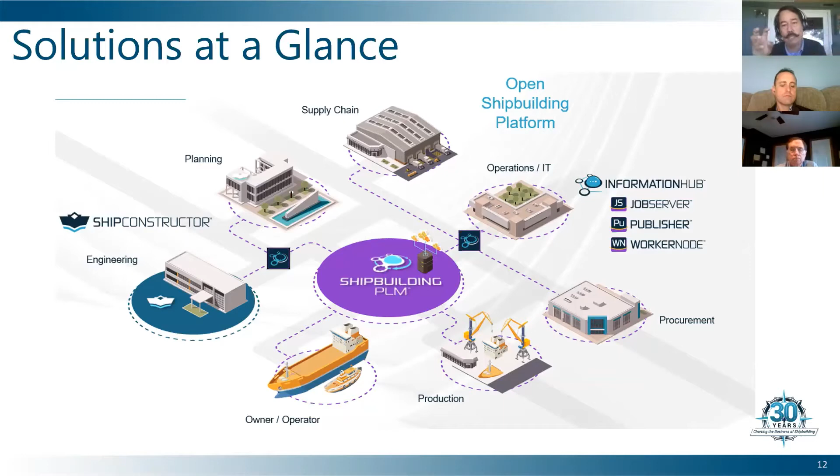And then, of course, the downstream of this is once we've built and delivered, we theoretically can provide either the model or management to the owner operators for fleet management or sustainment later on. And that's kind of where that PLM nugget ties all of that together.

This just says we have lots of products. In this project, we're focusing on structure and structural modeling, but we do quite a bit more than that - piping, HVAC, electrical, outfitting systems, distributed systems, equipment, penetrations. This is all kind of in the modeling and design work of this.

Nest and NC Pyros, for example, are kind of fabrication production tools. Work share and report, or purely reporting information, Ship Explorer and some other things. So we have a full suite for the ship design and product modeling requirements for a modern shipyard.

And we've done lots of stuff. I've known Rolf, who was the owner and founder of the company back in the day, probably since 2001, which is really when I started working on it heavily. So down at Bender Shipbuilding, which is actually the shipyard where I started working way back in the day, doing offshore supply vessels and platform supply vessels - that's what OSV and PSV mean down there.

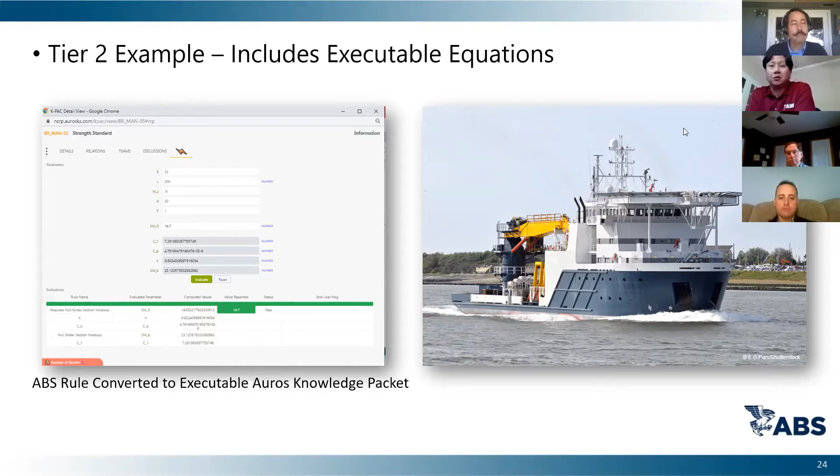Last slide is about tier 3. Tier 3 tools include K-PACs with executable equations and also can be linked to a CAD model. While at SSI and Auros since last year, we have been identifying a lot of beneficial use cases, such as global or local section modulus calculation from the 3D model and some plate thickness and stiffener scantling requirements.

With a given frame or stiffener spacing, we've also investigated how we can verify weld leg lengths based on ABS rule requirements just by clicking one button to verify the required welding leg length or welding size, something like that. So we believe this is also a very powerful tool that can allow a user to quickly evaluate the change to a sister or similar vessel design.

Having said these three tiers of our ABS digital rule vision, I believe our digital rules will significantly reduce the non-value-added time the engineer spends researching, retrieving and vetting usable information, and also reinforce the use of standard engineering processes and shipyard productivity standards. Eventually, we hope it can facilitate a faster turnaround for ABS, when ABS-certified K-PACs are used and the results of K-PAC rule checks can be submitted to ABS for preliminary review. That's all I have today.

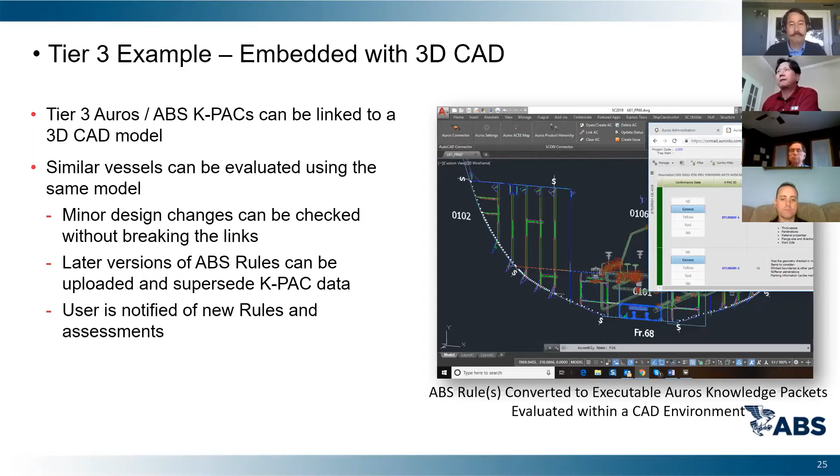Good morning, good afternoon to everyone, and thank you for joining us for this workshop. Hopefully you find it interesting and valuable. I'm a director at Auros Knowledge Systems, specifically focused on maritime systems. Auros Knowledge Systems is located in Livonia, Michigan, about 15 miles west of Detroit. The software product we produce for knowledge provisioning and knowledge awareness is titled Auros IQ.

So sometimes it causes a little bit of confusion, so the product itself is Auros IQ. Our company, we have development in other countries as well, in Ukraine and in India, and we have service partners located in France, India, and China.

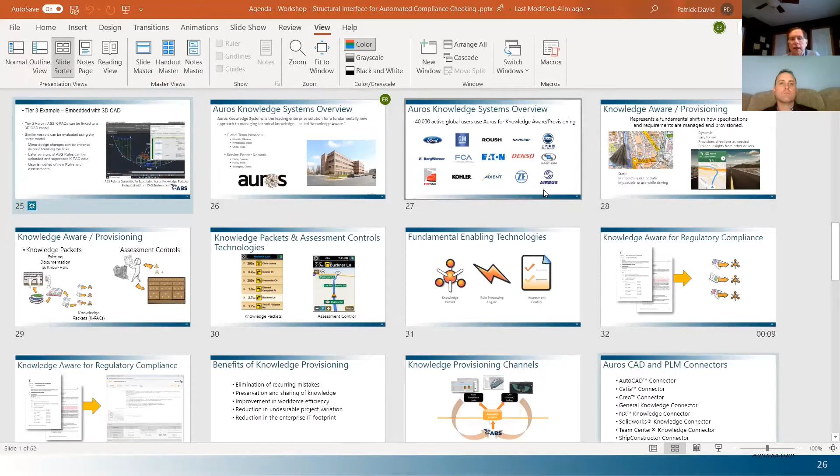So what we wanted to do was somehow—we had developed knowledge-based engineering applications, but we quickly found out that it was very difficult to maintain those, because if you had to make a rule change, you'd have to have a programmer program those rules right into the CAD software. So we came up with the concept of a discrete knowledge base that would not only represent knowledge in textual form, but also in digital form, so that it could be driven into digital tools to allow us to support model-based engineering.

So, as I mentioned, we grew out of the automotive industry, and we have a very large footprint in the automotive industry. We support from start to finish in Ford, General Motors, Fiat Chrysler, but we've also grown into many other industries. We found out that basically the challenge of delivering knowledge when needed is one that's shared by all industries, and the patterns are typically the same. There are some differences, but we've successfully grown to well over 40,000 global users that are currently using Auros IQ.

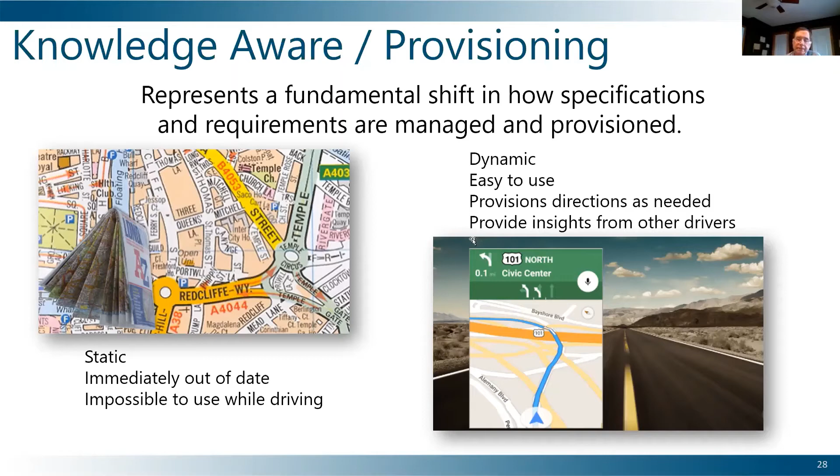So taking that back to knowledge-aware, what we do with Auros IQ is we have what you've heard termed knowledge packets. These are in essence elementary units of knowledge that have been stripped out or combed out of documents, rules, learnings that might occur on the plant floor. They're very specific, very unique to a specific bit of knowledge.

So you can see on the left-hand side here, we show a cartoon where you take these document-based systems and convert them into digital knowledge packets that are on the ready to be delivered when they are needed. On the right-hand side, we have the concept of assessment controls, which you heard Juan mention as well.

The assessment controls are a technology that is part of Auros IQ that is in essence a live, dynamic bucket that has a search routine constantly being updated with new packets or changed knowledge packets that are focused on a particular subject or topic.

So for instance, for someone working on structure or possibly looking at ABS rules for a particular area of the ship, the assessment control has the ability, using agents, to constantly bring in any new knowledge packets that are relevant to what that individual is using.

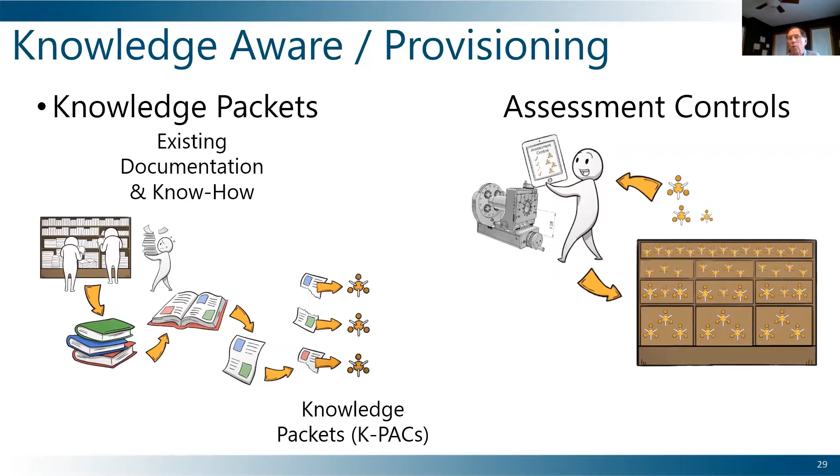They're delivered to the worker, and then the worker, or the decision maker, the knowledge consumer, responds and indicates how they've utilized that knowledge, whether it's been in compliance or not. If it's not in compliance, it allows you to capture the reasons why and what the alternative is. Next slide.

So going back to the map and GPS analogy, the knowledge packets really are those tiles that pop up and give you the specific turn information, where you should turn, when a turn is coming up in the next mile and a half. You can think of those as a knowledge packet. Each one, again, is an individual bit of knowledge.

The actual screen, which is used to deliver that information to the consumer, you can think of that as the assessment control, because as I start, I entered in an assessment or an address.

Based on that address, it delivers and lines up the knowledge packets that I will need at the time their need, and then they will be delivered to me as I progress through my process. Again, if I end up making a change, or there is a change in the system because there's a backup or a road closure, the assessment control is constantly looking for those changes and pulls them up and then delivers that new knowledge to me as a driver. So that's basically knowledge aware.

So Pat, the next slide, please.

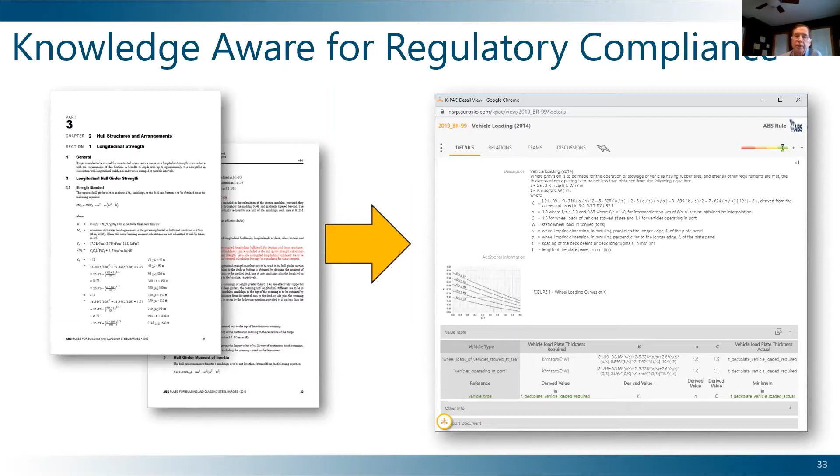All right, next slide, please. So the benefits of knowledge provisioning - these are five that I chose because I think these are some of the most significant. The elimination of recurring mistakes.

Whether it's done through a CAD system or by delivering critical knowledge to a designer as he or she is working on a design, because you've captured possibly learnings from warranty systems in the past or production issues that you've had and turned those into knowledge packets, and those knowledge packets have been tagged and identified for where they should be applied, you can guarantee that things used in previous years can be delivered to individuals that need to know that at this point in time.

Obviously, you're preserving the knowledge that's being captured. And because it is an enterprise system, that knowledge can be delivered to many different locations through many different channels.

You have an improvement in workforce efficiency because now you're enabling an engineer to proceed with the design, making decisions without the need for searching and going through books or libraries, downloading documents and then looking through PowerPoint slides and figuring out what elements of that presentation or final report are really applicable to his or her particular situation. It's a much more efficient approach.

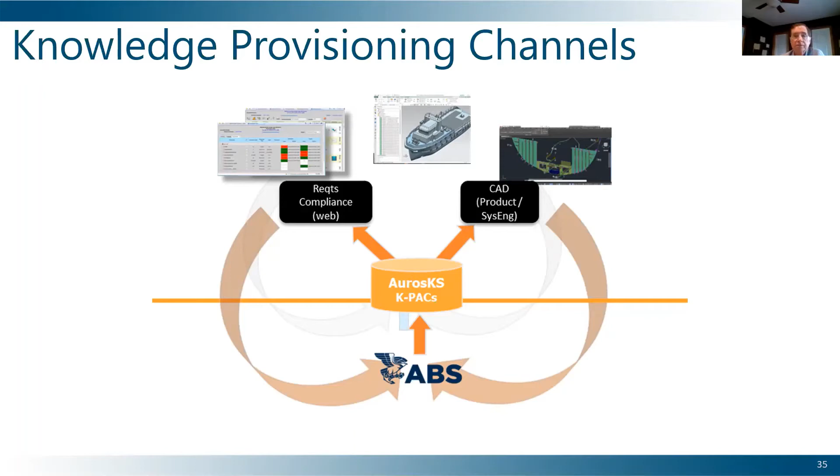So we've developed a number of CAD systems. We've been using it since the beginning of Auros, in the early 2000s, because people were interested in connecting it digitally to their CAD systems. We have these existing CAD systems already developed, and we have the general knowledge connector, which is basically a starting point for implementing a unique connector. Many of our companies have actually developed their own connectors - these are ones we've developed for some of our clients. We've also got PLM connectors that allow us to track progress and process and hang the various assessment controls along with the assembly or components, to ensure we've captured and maintained the assessment used to develop that component or assembly, so you have traceability of how you got to where you're at. This project is focused specifically on the SHIPCONSTRUCTOR connector, with a focus on the ABS rule deliverables.

So this is just one example of one of our clients that has been using Auros IQ to deliver their rules directly into their CAD system. They use NX, and they've identified that it's been a significant contributor to reducing their warranty issues over the last 6-7 years. They actually had a very large knowledge-based engineering section, and what they've done now is taken all the rules that were developed and written directly into their CAD systems, pulled those rules out, and now they exist within Auros IQ so that they can easily change those rules as authors and drive the designs more effectively.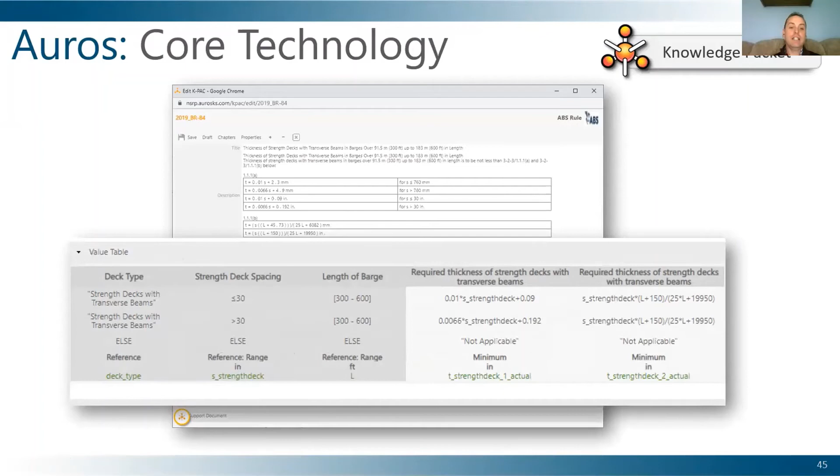And for this particular project, this is really important for what we're doing in terms of being able to talk to a 3D application. In this case, this value table defines that constraint. It's the model of that rule. And even if we don't read the textual area of the rule, we can see it's talking about this thickness.

Based on a certain deck type, there are some inputs we need to know. What's the deck type? What's the spacing? What's the length of the vessel? And then based on that, there's some conditionality that invokes different rules. You can see all these result in these little green parameters down here.

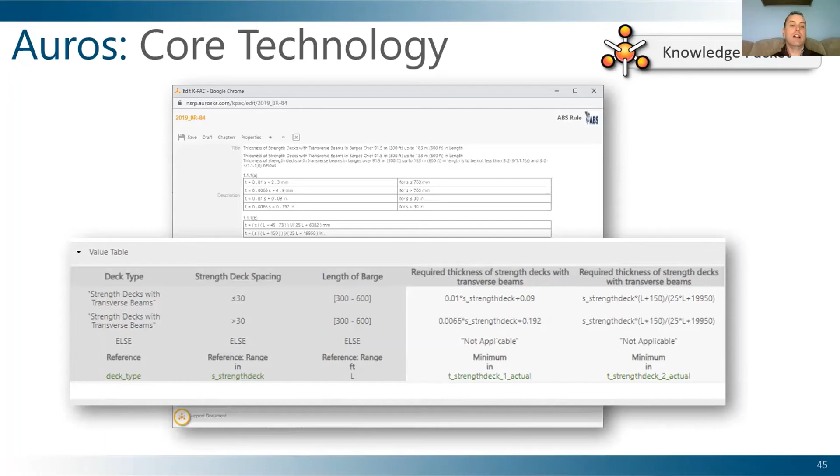I'm going to show you how these green parameters are the items that get passed between Auros IQ and ShipConstructor. These are the things that allow us to rule process these parameters inside of the 3D model. The way we're going to do that, we're not just going to pass the knowledge packets themselves. We could do that, but when we talk about this project, one of the things we need to focus on is we needed to be able to deliver objective quality evidence that the rule was met. And the way we do that is through this thing called an assessment control.

That assessment control is really the brains that says, for this particular operation, you're in the midship, and you're working on structure, maybe it's deck plating and whatnot. The assessment control is the brains that says, here's the context of what you're working on, and it goes out and harvests all the relevant knowledge packets related to that context and brings it to you.

You can see there's a collection of knowledge packets here. Each one of these lines represents a knowledge packet. So for this project, these are all ABS rules, and this is actually deck rules that get brought in.

And what happens is, as we utilize these rules, we have traceability that those rules were utilized for a particular project. When we connect these rules to a CAD object, or either the drawing or a part within that drawing, then we have traceability from the assessment control to that drawing or the part within that drawing. We can make those connections to see, okay, the thickness is a result of this particular part within this drawing. And we can trace that back, and we can see those values, where they're coming from, what was the model and such.

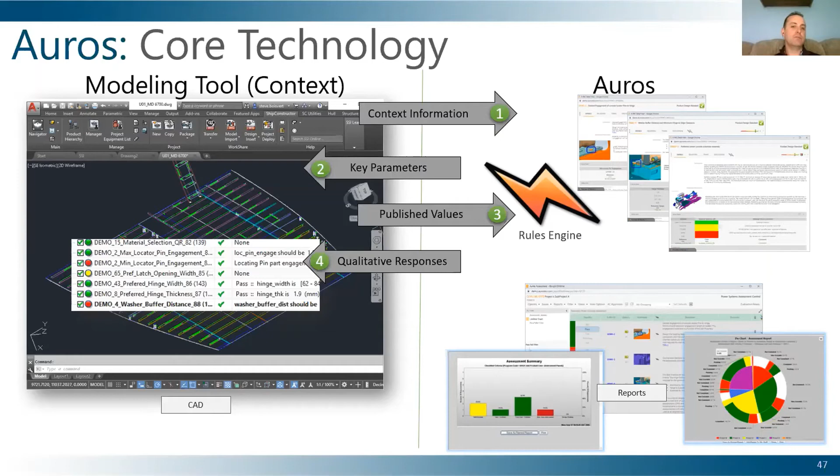But first, the first primary thing we need to do is define some settings. And then this is where we're going to attach it to an assessment control or a collection of knowledge. That collection of knowledge is going to then result in some parameters, which is the middle section. And then once we have those parameters in the model, then we'll be able to rule process. So there's 3 primary steps that we're going to go through as we look at some examples.

Now, the big challenge that we had on this project is we have an application that does 3D modeling really well, and we have an application that creates these executable rules and parameters really well. But underneath all that, we had this foundational application that really had no concept of 3D parametric modeling. The concept of parameters inside of the AutoCAD 3D model just wasn't there. So the first hurdle we had to overcome is, how do we get these parameters stored on the drawing or on a part within the drawing?

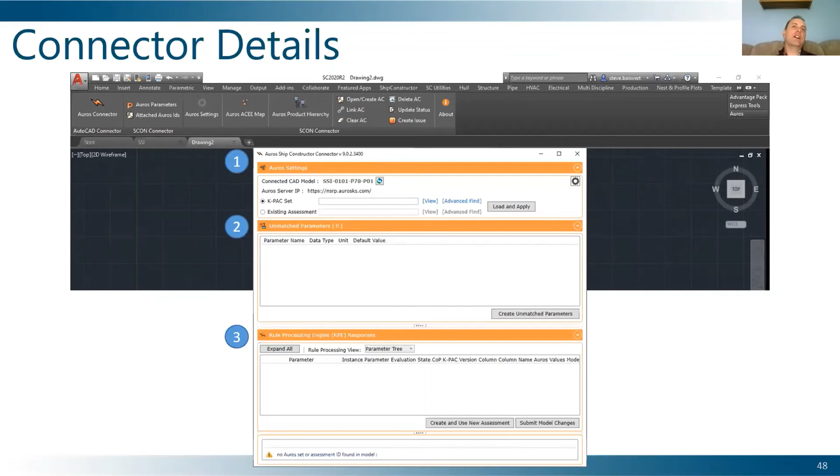And so we developed some technology where we can now take the parameters from the rule set and store them either at the drawing level, the overall drawing, or on a specific part within that drawing, and then have those parameters stay persistent, so those values remain once we save that drawing or part. So the next time we come in to rule process, those values are still there. So that was a big hurdle we had to overcome right off the bat with this project.

And so once we were able to overcome that, what we had to do was provide a way within the modeling environment to take these parameters that exist in the rules and allow us to link those parameters to different aspects of the model. So what we have here is the parameter palette within ShipConstructor. You can see across the top ribbon here, we have our Auros menu options, and this little window here is what happens when we want to process our Auros parameters. It brings those in and stores them either at the drawing level or at the part level. And then it allows us to define those parameters either against a measurement or a property value, or some calculation or a manual entry value in some cases.

But it allows us to say, in this particular instance, the thickness of plate 1, give it a value. We either manually enter it, or we select a part, and based on the part that's selected, automatically get that value from that particular part.

And then we can have that rule process once we have these parameters. So the particular features we're looking at here are our Auros parameter menu option, and once we execute that Auros parameters menu, we get our parameter palette, where then we can enable the Auros ShipConstructor connector, and go through our three steps there.

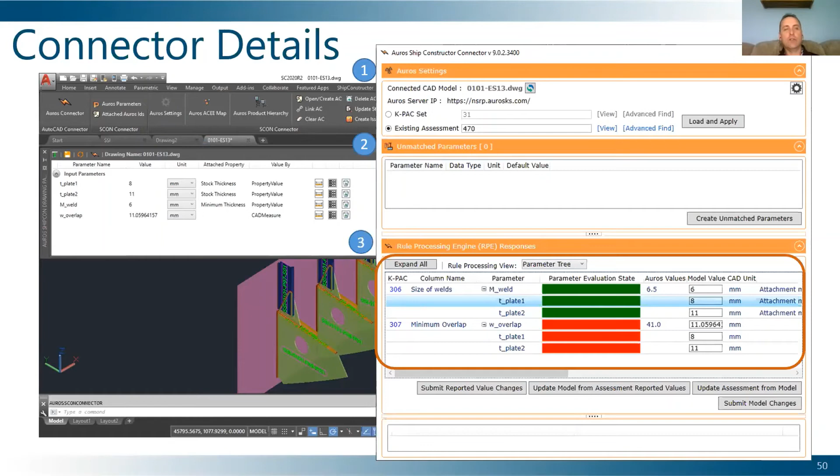Once we have our rules or parameters attached to different properties or values, the rule gets processed, and we can see an indication of whether that rule is passing or not passing the intent, in this case of an ABS rule. Given the values within the model, we can see whether or not they pass that rule. Then we can store that information back to Auros and provide it to ABS as evidence that a rule is either passing or failing their criteria.

Along with being able to attach the parameters and do this and that, we had to have a way to maintain those parameters. So once we're in a model, in a drawing, we can see which parts or drawings have an assessment attached to them. That's all this little feature is doing. It shows whether or not there's something there, and we can click on that link and it brings up more details. It's our way to visually see within the application what have I done, which ones haven't I done, if I'm checking each of these different parts.

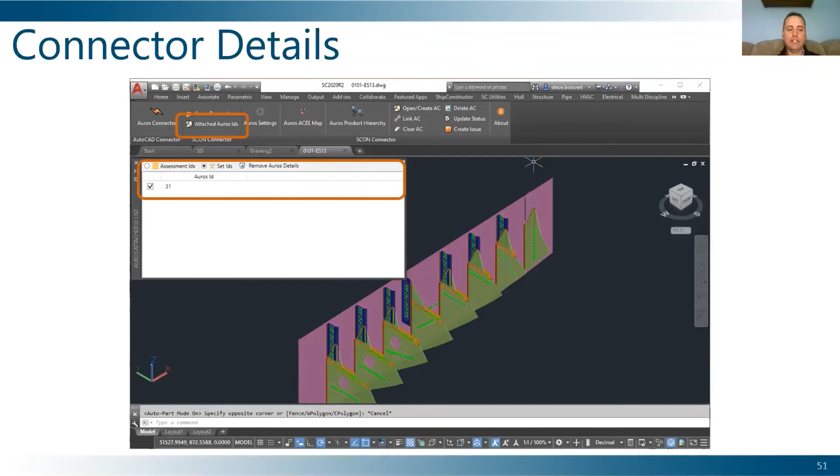Throughout this project, once we developed that core functionality and were able to take the rule set and those ABS rules and get them into an executable form where they all have parameters, we went in and said, now that we have this functionality where we can take those rules and store those parameters against the part or the drawing in general, what are some of the primary use cases where this might be applicable? Out of that, we came up with four primary use cases, and I'm sure there's lots more, but these four give us a pretty good indication of what's possible with the current connector.

Our first use case involves basic sizing, whether the rule is an ABS rule, maybe an ASTM F1166 rule, or just shipyard tribal knowledge where there's some sizing requirement that needs to be verified in the 3D model. Use case one is all about those requirement checks. So what I have here is a little video, and I'm going to play it and narrate it, and we're going to walk through how the connector works, and see how the measure feature is the key aspect of this particular use case.

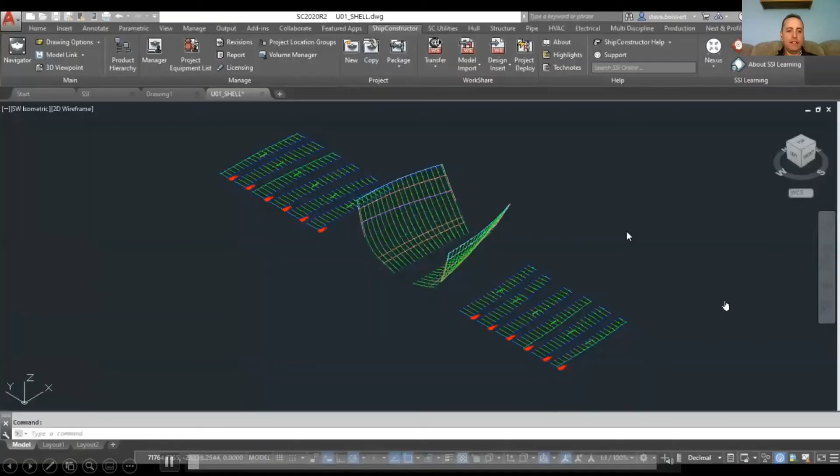All right, so there we go. For this example, we're going to look at side shell plating, and this is the training project in ShipConstructor. What I've done is open up the Auros tools menu, and you can see our tools across the top. There are several different ones, but the one we're interested in for this project is the parameters. Once I clicked on Auros parameters, it opened up the parameter palette.

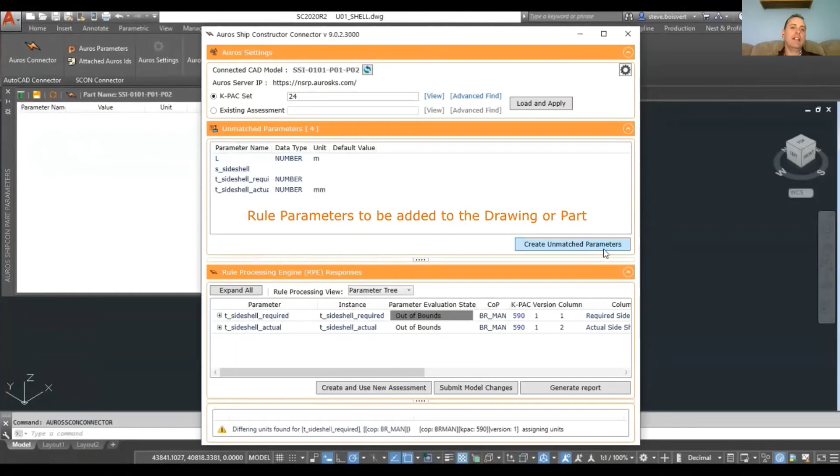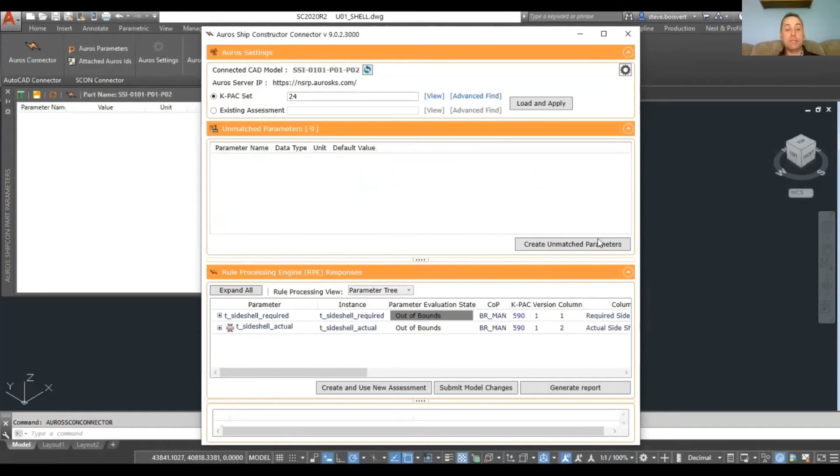I see this little lightning bolt here where it allows me to connect to Auros IQ and to a set of knowledge, right? So there are rules based on this particular drawing that have parameters, which are shown as unmatched because they're not in the model yet. What I'm doing is adding those into the model. The drawing didn't have those parameters; I told the connector to add them to that drawing, and that's what you see here.

So once I have them in my drawing, I store that against the drawing, but I also have access to the specific rule itself. Now I'm going to open up the knowledge packet to give you an idea of what we're going to check. In this case, it's side shell plating, out of the ABS barge rules. The knowledge packet for this has a value table, and it results in these parameters. What I'm doing now is giving you an author view of showing how this rule will get executed.

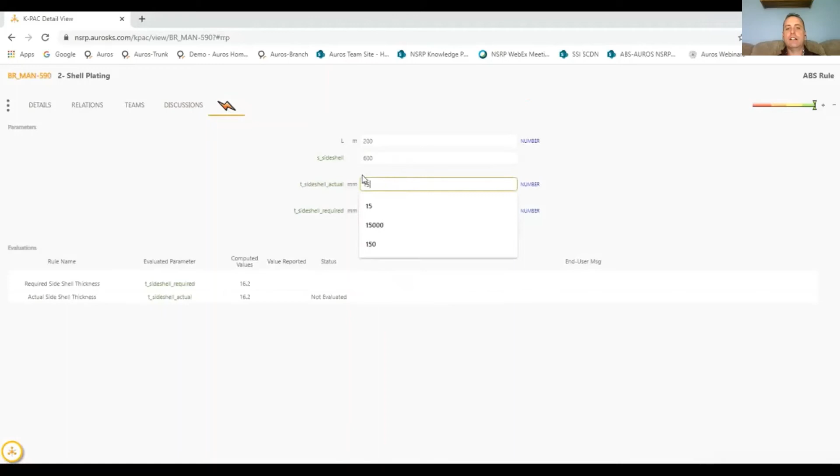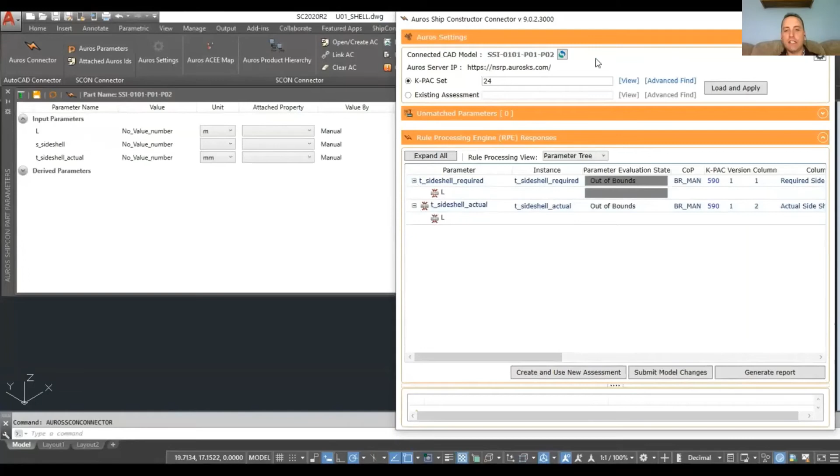If I know the length and I know that frame spacing, I can calculate what's required for that side shell thickness. And given a value from ShipConstructor for the actual, I can compare that and see whether I pass or fail. Inside the model, or the drawing, I can see that I have this little broken link inside of my rule processing engine.

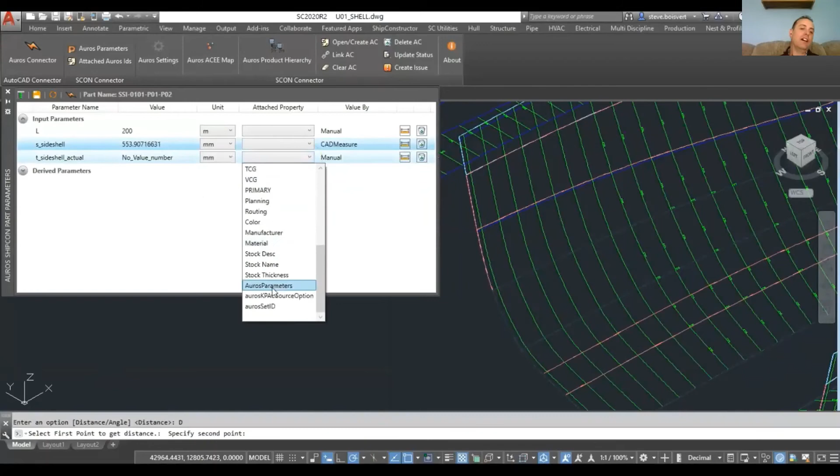It's showing that these are not connected to anything in the drawing. They're part of the drawing, but not connected to dimensions or any kind of attributes. So what I'm going to do is take those parameters and connect them either to a measurement, fill them in by hand, or in some cases, like this actual side shell value, that's an attribute value of that plate. So I can tie that parameter, side shell actual, to the stock thickness attribute, which you can see here. And that gives me my value.

Once I have all of my parameters connected to information in the model, that goes off to the rule processing engine. And then that rule processing engine sends back an indication whether or not I passed or failed that rule, based on information provided to the rules engine from the drawing. And that's what we saw right about here, where we saw the red indication.

And we can see what's calculated within the rule. In this case, my required was 12, but my actual is 10. So that's why it's failing this particular rule. And actually, if we scroll over a little bit, there's a little message that tells me, hey, your required value is this and your actual is this, hence it's a failed condition.

But what I want to focus in on here is we used a few different features to rule process. We used a measure where we're able to go directly to different points of the model, or the drawing, and attach a measurement. In this case, it was for frame spacing, and we measured, and it was 553 millimeters. And we provided that along with the length of the vessel to indicate which rule we need to use.

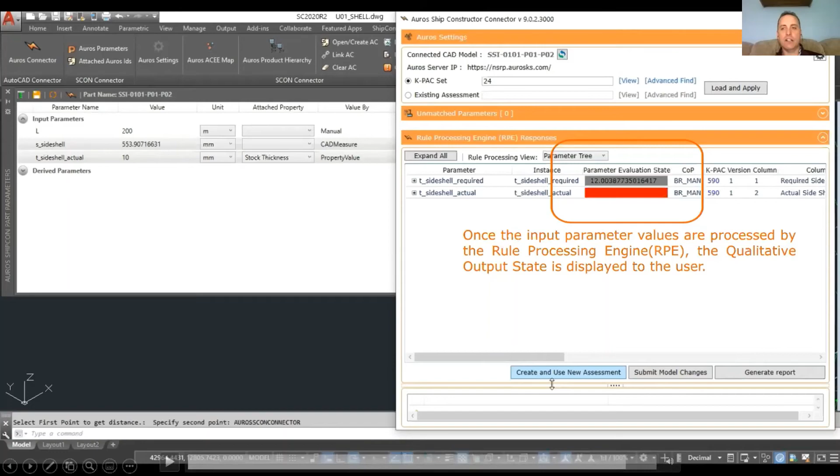So use case one, basic measures, right? So maybe this is the size of a cutout, plate thicknesses, or the height of a guardrail. Some of the examples you might get, anytime there's a measurement, a reference to a size, this is a pretty good use case to verify within the 3D model.

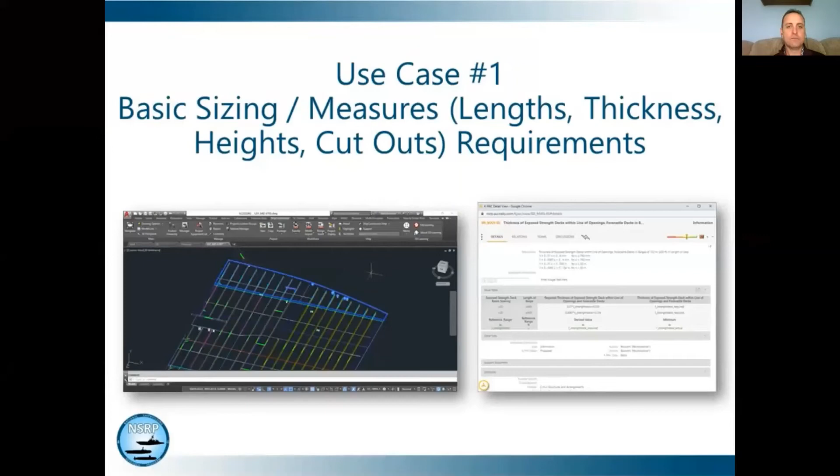Now, our second use case that we're going to look at, this one actually came from Charlie. So Charlie said, one of the things that we do is we don't really check until it's in 3D are things like our incline ladders, because on the drawings, they're flat and there's an indication that there's a ladder there, but it gets modeled after the fact and we have to go in and verify it. So it'd be kind of nice if we could check some of those rules in the 3D model, and how could we do that?

So this example is going to utilize a lot of that same functionality we looked at in use case one, but this is an example where we can look at a little bit of a different aspect of our measure, because this one requires an angle. I like this example because there are some subtle differences between what we did in use case one and what we'd have to do here to verify these incline ladder requirements. Now, these aren't ABS rules; this is from ASTM 1166, but still very similar. We took a rule set and codified it into knowledge packets, creating value tables with parameters that we'll pass into this example. So here's use case two.

So again, we have our Auros menu open. We're going to go to those parameters. Now this time I'm on the drawing. I wasn't on a particular part, and you can see I'm on a drawing based on what's here and what's listed here, connected to CAD model, and it says drawing. It doesn't say this particular part.

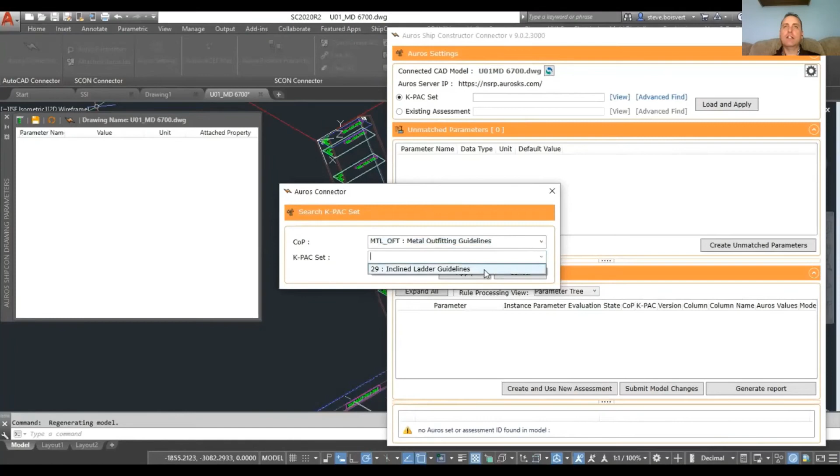In this one, I'm going to go off and tell it I'm going to use the metal outfitting rules that I created for this example. So this is going to go and say, all right, I need these knowledge packets. And I'm going to grab the knowledge packets that I need for inclined ladders, which results here. What happens is it says, for those rules, these are the parameters that are related to them. This is showing me those parameters, and this is where I'm going to add them into the drawing. So now they have been added to the drawing.

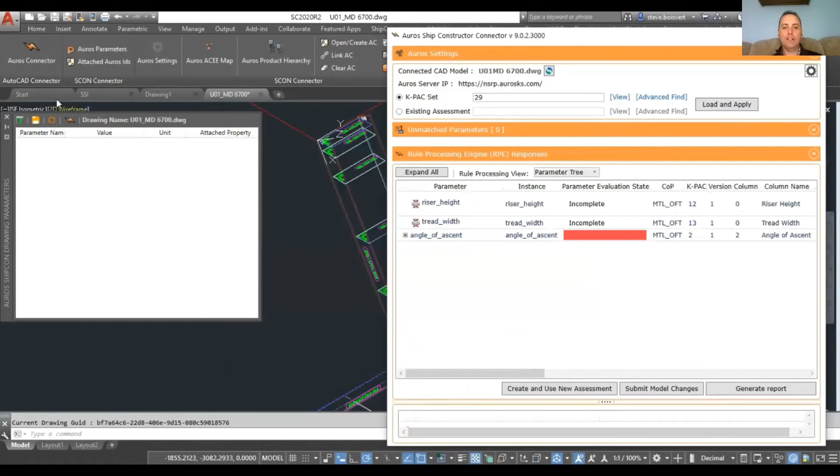If I do a little update, you can see that they're in my parameter palette. Now again, they're not attached to anything. They're just there. So they're parameters that are stored against the drawing, but they're not linked to any dimension or to an attribute value.

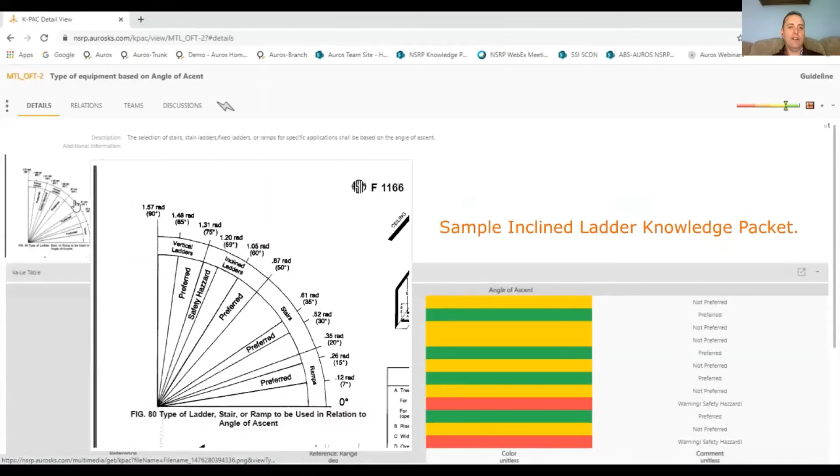One of the things that's useful is if I want to know how the rule needs to be used, if I want details of that rule, there's a quick link to get me right to that knowledge packet. You can see the value table for this one. Actually, I'm going to pause it right there. So the value table for this one has some conditionality of the type of incline that's required.

We're going to detect some of this information - actually, we're going to define this - but we're going to look at how we can define the type of equipment being used. So kind of a conditionality. And then we're going to look at the angle of ascent, basically how steep is that angle. Then based on that angle, we're going to get an indication of whether it will pass or fail based on these preferred and not preferred zones, which all basically came out of this image from ASTM 1166.

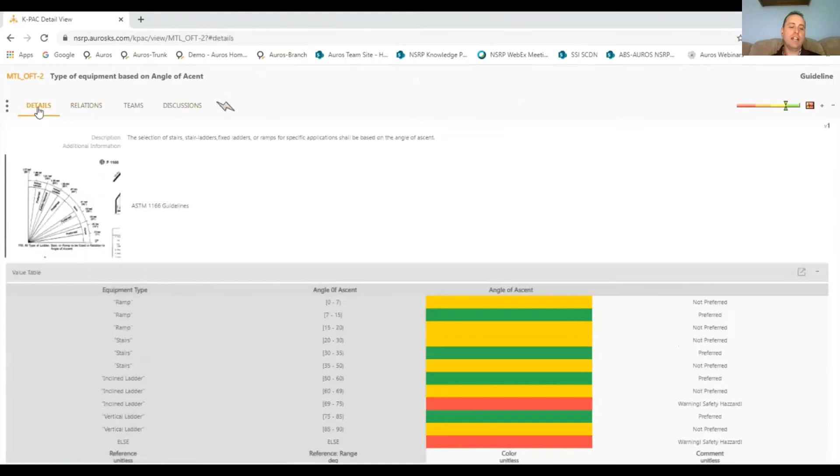So this is how the knowledge packet is going to process. We're going to look at that by clicking on the little lightning bolt, and given the equipment we're going to use - an incline ladder - if that incline is 50 degrees, we're good. If that incline is 65 degrees, that's not preferred. If that incline is 70 degrees or above, then it's a safety warning, and you're going to see here. So again, this is kind of a way for the author to check that rule to make sure it's working correctly before we put it into a model.

And so now that I know about that rule, I can see my little broken links there. So these haven't been attached to anything. This is the information for me to go to the parameter palette and start to connect the parameters to objects in the model. So in this case, what we're going to do is...

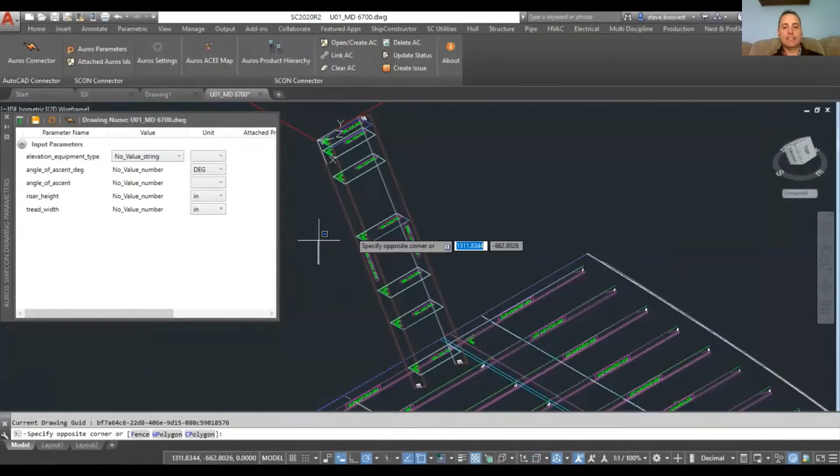Before we can actually run this particular rule, we have to change the UCS because this requires an angle measurement. And if we're not using the proper UCS, we're not going to get the proper angle. So the first thing I'm going to do is set my UCS based on that leg of that incline ladder. And then now that I have that set, I can click on my parameters.

You can see those parameters pop right back up because they're stored against the part, or they're stored against the drawing. I'm going to define my equipment type - I'm using an incline ladder. I'm going to run my measure, and this time I'm going to run an angle, right? We're going to look at the angle of this leg compared to the deck. So I'm going to select that leg, and then I've got to select the reference line for the deck.

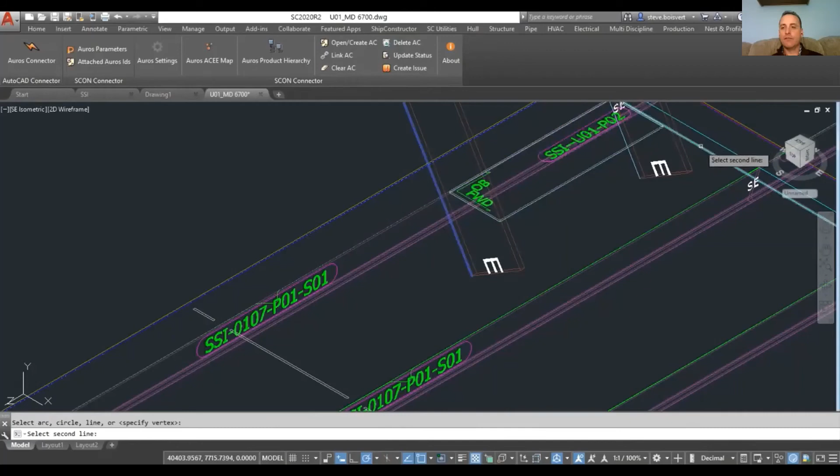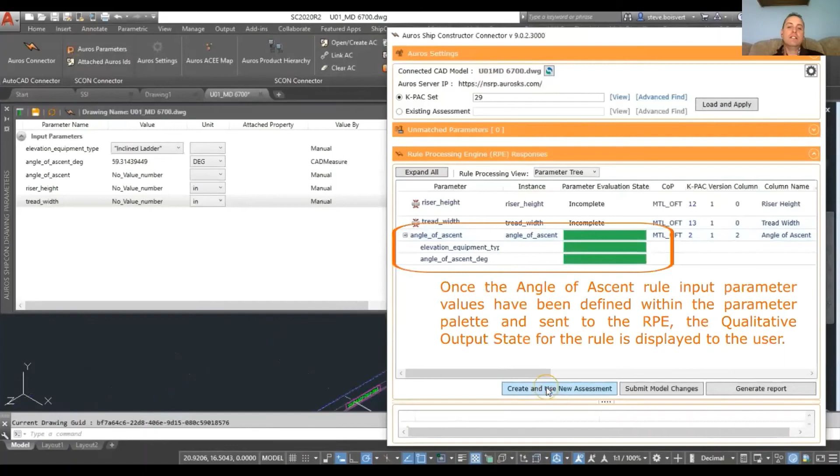And then from there, I can get my angle measurement, which is then stored against angle of ascent. You can see it's 59.31 degrees. That's the incline ladder Pat David liked, and that's the one he modeled. He wanted it at 59.31 degrees, which ends up passing that rule.

So the equipment type rule passes now that we know it's an incline ladder at 59.31 degrees. But there are two other rules, right? We're not just checking one, we're checking three. There's the riser height and tread width that still need to be validated before we can say this incline ladder is any good.

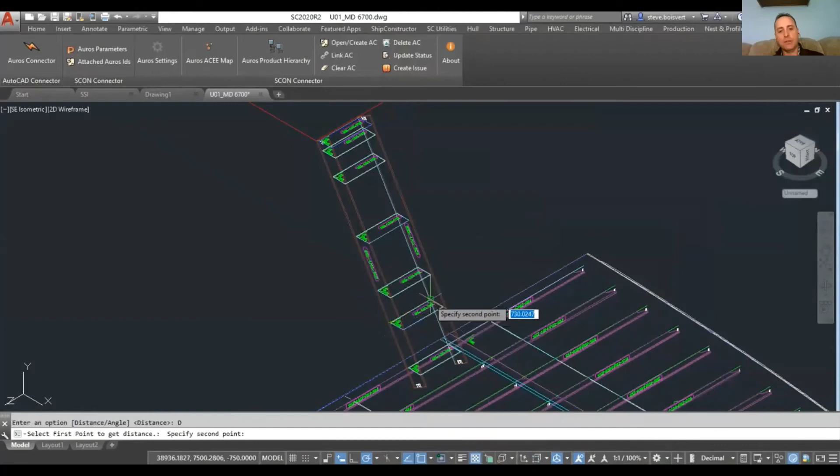And so again, I can just use measures. We're going to look at just one of the risers. Ideally, we would have instances for each riser and could check each step, but we're going to look at worst case. So I checked the worst riser and the typical tread width, and you can see I did that through a CAD measure.

Now that I have these values, I can rule process those, and that's going to open up here in the connector and show me whether or not I passed. So our angle of ascent is good, but our riser height is really bad, and our tread width isn't correct.

And again, with that information gets stored, we can pass that information to whoever, because it's stored in the assessment control. We can provide that assessment control as evidence that links back to that drawing or that part, so we can provide it to ABS or whoever needs to verify that information. So that was use case 2.

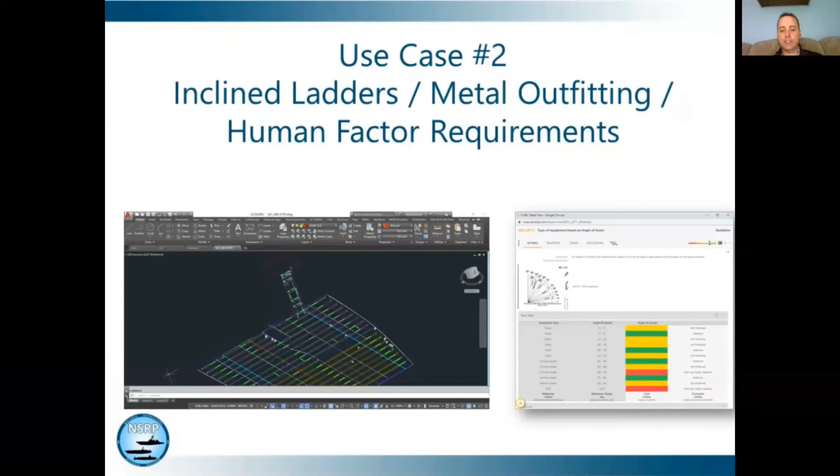So use case 3 came to us from ABS. One of the things that came out of the project was Juan Min said, can you use this functionality to check welding? And we said, well, I don't know, but we'll figure it out. Turns out we can.

And this use case is going to show how it doesn't necessarily have to be a plate or a stiffener, that we can gather information from even weld objects and run these calculations. So we're going to play this use case 3 video.

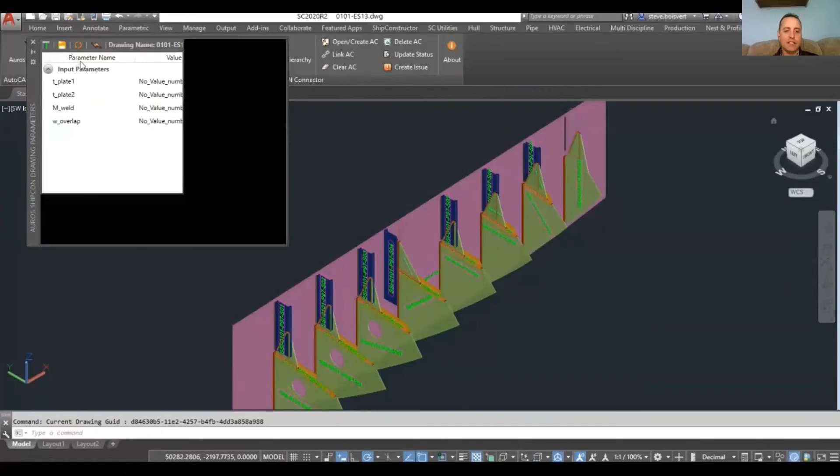This starts out with the training project again, and we have a drawing all around welding. We have this panel with some stiffeners, and the items in red are the weld objects. In this one, we already have the parameters added to the drawing.

We're connected at the drawing level, you can see that up there. This is an example of one of the rules, talking about some T-joint boundary connections. And if we know the thickness of 2 plates and the weld thickness, we can calculate whether or not we pass or fail that rule.

Again, I'm just testing the rule as an author to make sure it's functioning. So you can see I've put in some sample plate thickness values and entered a sample weld thickness value, and it came back with a result. So the rule is working as I intended it.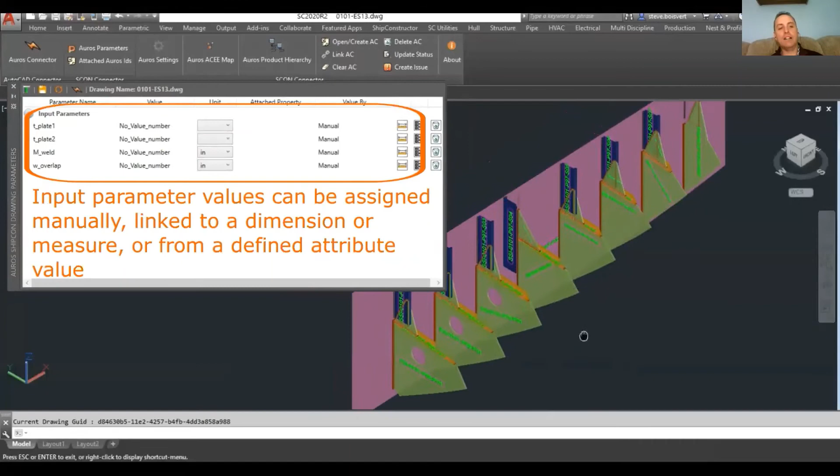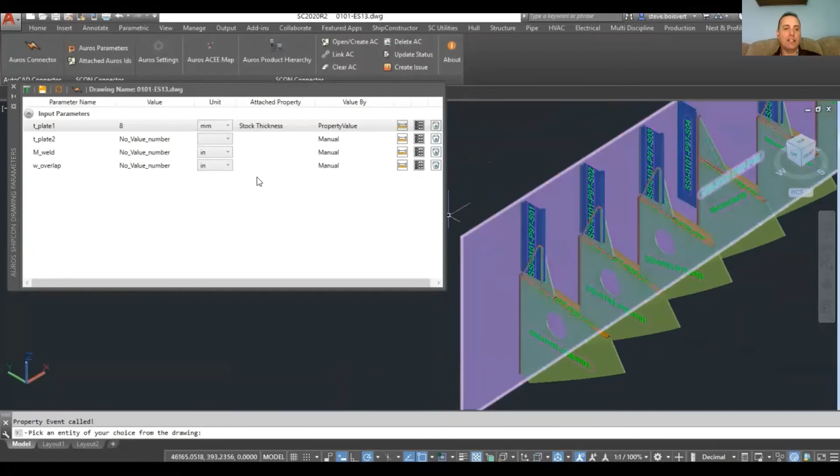Now in the model, I'm going to attach those parameters to, in this case, a couple different plates. I'm going to use a property value for plate 1 and select this vertical plate. To get the thickness of that plate, I'm going to choose its stock thickness, because that's the attribute value related to that thickness value. For the second plate, I'm going to choose this bigger plate here and relate that to stock thickness. You can see there's 2 different sizes, 8 millimeters and 11 millimeters.

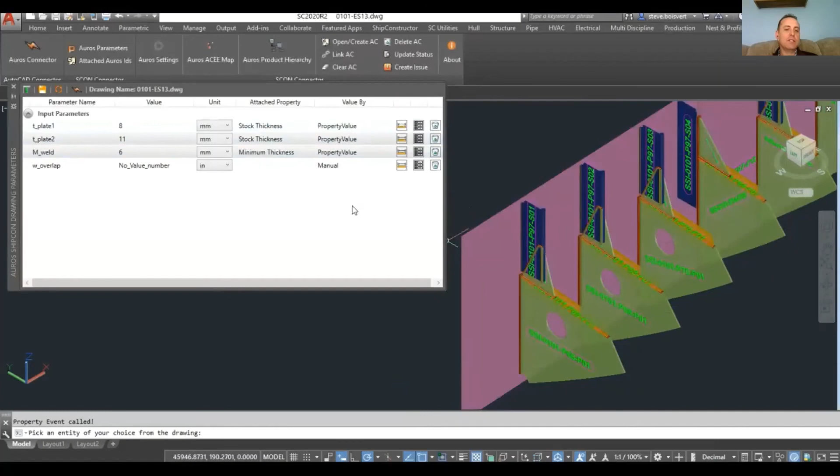To get the value of the weld, I can select that weld object and tie that right to the weld thickness, and I get 6 millimeters. I actually have a second rule in here that talks about some overlap, and I'm going to use the measure function to just do a quick measure to get that overlap value. So now I have all of my parameters attached to objects in the drawing.

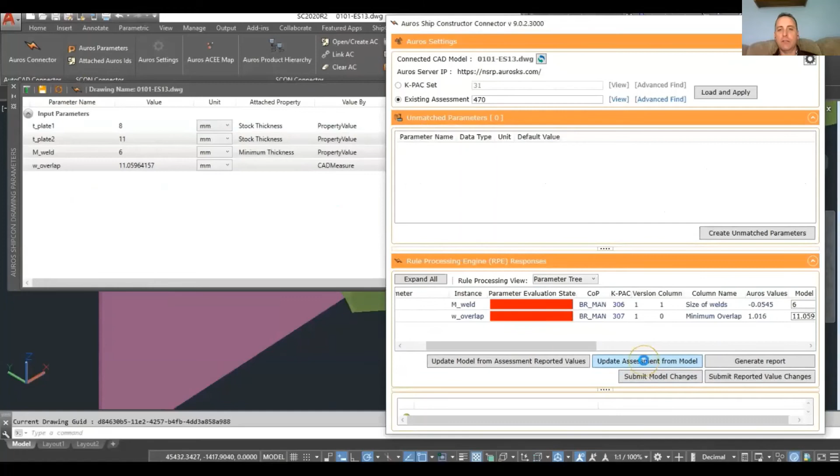Those get sent off to the Auros IQ rules engine, and I can see how those rules get evaluated here in the connector. In this case, I didn't do so good on my rules, and I have some failed welding requirements based on my rules. Again, that's all stored in the assessment control and can be seen here, where I have some rules, and that can be passed to ABS as evidence of meeting or not meeting that rule.

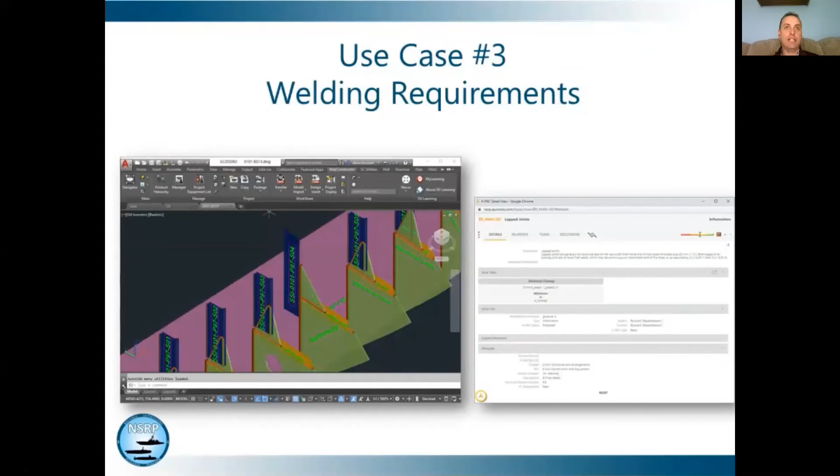In our last use case, we're going to look at one where we actually had intentions of doing more. We wanted to look at global section modulus, like at the midship section. And as a result of that, we couldn't do that, but what ends up happening is we had to be able to solve whether or not we could do a local section modulus calculation before we can solve a global section modulus calculation.

So our use case 4 is just showing our ability to utilize the knowledge packets and some of the calculations that occur within the knowledge packets, along with some information in the drawing, to determine whether or not we're meeting section modulus calculations. For this example, we're just going to look at one stiffener and see whether or not that particular stiffener is meeting its section modulus requirements.

So we're going to play a little video.

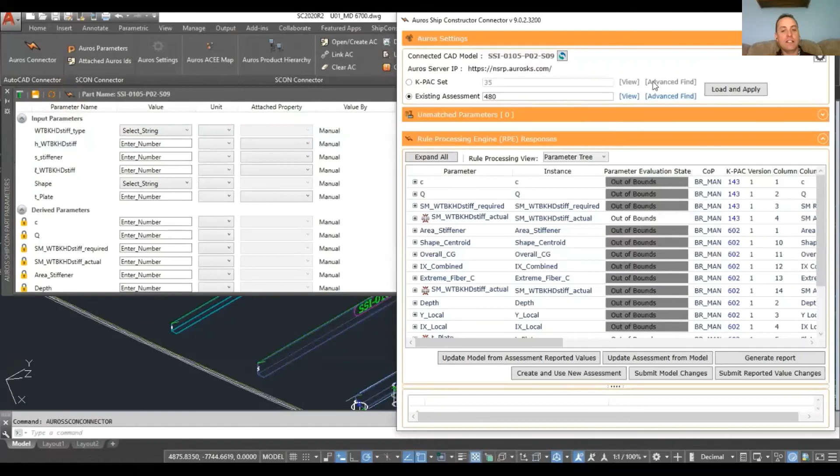So in this case, I have a deck drawing open. I have some stiffeners here, including this L stiffener. We're going to start where I already have the parameters attached to it. In this case, I have several parameters in order to be able to calculate the required section modulus. If we look at the connector, you can see there's a lot of parameters to determine a section modulus value. This is the assessment control showing just the parameters for section modulus.

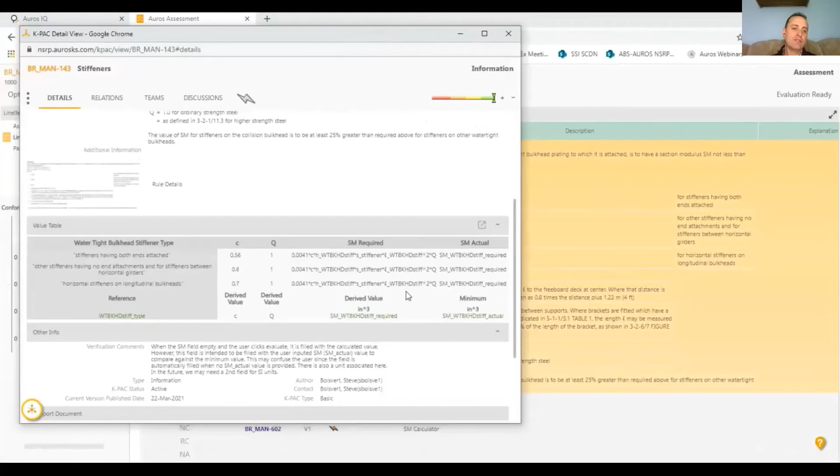And to calculate it, we actually need two knowledge packets. The first knowledge packet is going to define the rule for that stiffener. This comes from ABS, where it's going to define that rule. In this case, it's this stiffener requirements for a watertight bulkhead, but it could be any number of the section modulus ones. This is just an example we used.

In this one, you can see I'm checking the rule. So there's some conditionality on the type of bulkhead - what's the height, what's the frame spacing, what's the length. And then once those values are known, there's a calculation that happens where I can determine what the required is. And then we need to figure out what the actual is.

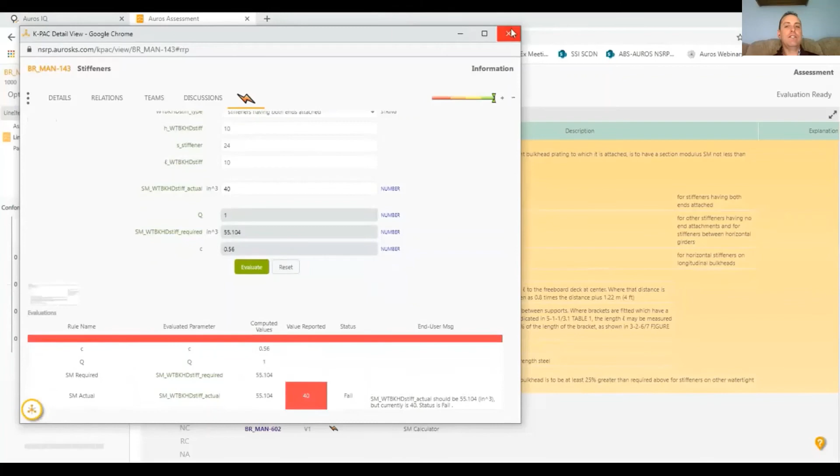And to figure out the actual, we actually need a second knowledge packet to do that. We're going to use the two knowledge packets together where we can compare the value from one knowledge packet to another and then get us a status.

So this SM actual actually comes from a calculation sheet provided to us from Charlie. Based on an input of the type of stiffener, what's the shape of that stiffener, what's the frame spacing, and what's the plate attached to that stiffener, we can determine what that section modulus is for that stiffener. In this case, it's a parameter that resulted, and that one was 40 was the value.

So we're going to do the same thing in the model. I'm going to kind of shortcut this example a little bit because I don't have all of those input values as attributes. So some of these I got to manually enter, like the height. If there's an attribute for height or length or whatnot, we could attach those. For this one, we're just going to either do some measures or I'm going to fill this stuff in. And that's what you're seeing here.

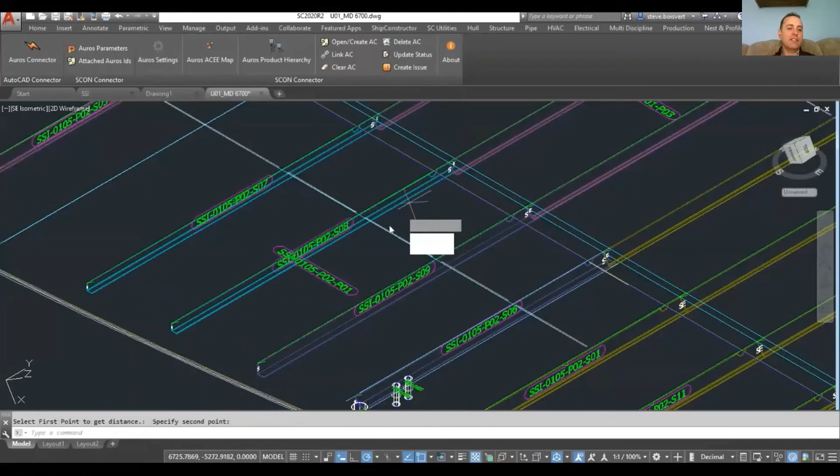In this case, I'm going to measure the plate thickness. Could have done that from the properties. And I also could have gotten the shape from the properties too, if shape parameter was also the shape attribute name. But in this case, for this particular example, I'm just going to select it.

And then based on that, now that I have a value for all of my inputs, I can calculate what my required is and then compare that to the actual. And then I get an indication of whether or not I'm meeting that particular section modulus calculation.

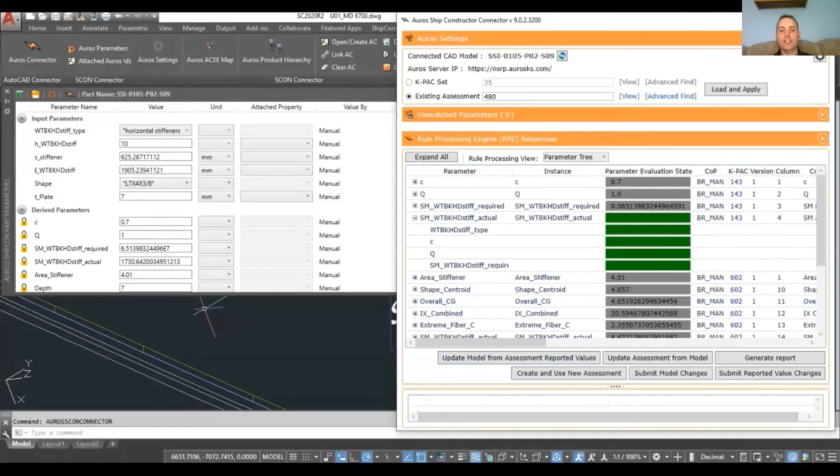In my drawing. So those were kind of a summary of 4 different use cases that came out of discussions with the shipyard of potential ways to utilize this type of functionality, and ones that we actually had models for within the training environment that we could simulate some of these use cases along with having rules to apply to the drawings within the training environment, because that's actually all I have on my little machine here.

So hopefully you get an idea of kind of the flow of the transfer of parameters from the knowledge packet to the connector into the drawing, and then the ability to attach those parameters to objects in the drawing, and then have a rule process. And actually, I'm going to do one of those live start to finish, even starting from creating a knowledge packet here in a minute, just to give you a little bit better idea, and not show you in a movie, but show you in live how it's done.

Even though that's probably not wise because Murphy's Law, something's probably going to happen, but I'm going to try it anyway, and we're going to just see what happens.

But before we get to that, before we do one live, I touched on a couple things. One of them was some of the things we wanted to do in the project, but they either fell out of scope, or there's functionality that just didn't exist yet that we couldn't utilize or couldn't get developed in time to include in this project.

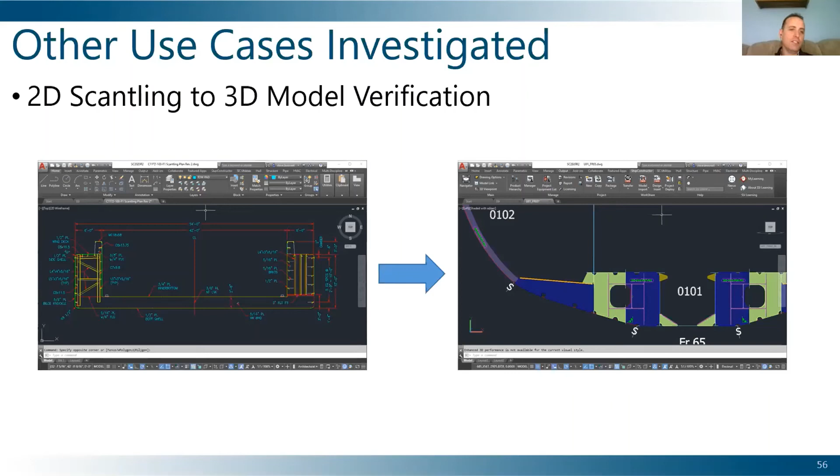We looked at it long and hard, different ways where we could get property, mass properties from AutoCAD, and try to compare that to things we know and summarize the section modulus. Again, it kind of became this big effort that we weren't really sure we could contain in the amount of time we had left, once we had the core functionality in place.

So we decided we needed to figure out whether or not we could even calculate a local section modulus before we could spend time determining whether we can do a global section modulus. With some of the last few weeks of the project, we developed the capability to look at a shape of a stiffener and determine its actual value and compare that to a rule to see whether or not we're meeting local section modulus values. The global section modulus capability just fell out of scope.

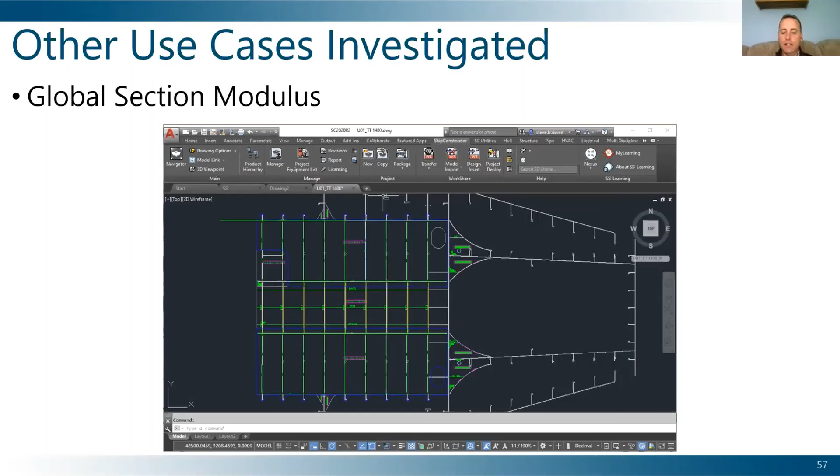So what I want to do now is take a different approach and not just show you a video. I want to open up ShipConstructor, open up Auros IQ, and we're going to create a knowledge packet to show you what's involved, because I started my demonstrations showing there's already knowledge captured, already rules provided from ABS or whatever that result in these parameters. I just showed how they get plopped into a drawing and we attach things to it, and then everything shows up green or red or whatever.

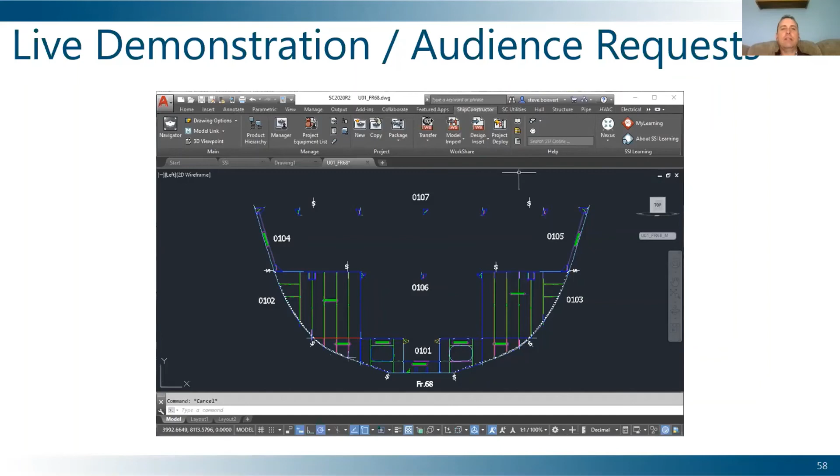But I want to give you a better understanding of the level of effort involved to make that happen, start to finish. We're just going to do one rule, but I want to give you an idea of the level of effort. So for that, we're going to hop out of our presentation mode here, and I have a drawing open.

So this is, again, the training project within ShipConstructor, and you can see there's Pat David's sweet little incline ladder sticking out over here that we had in our demo. But we're going to create a rule.

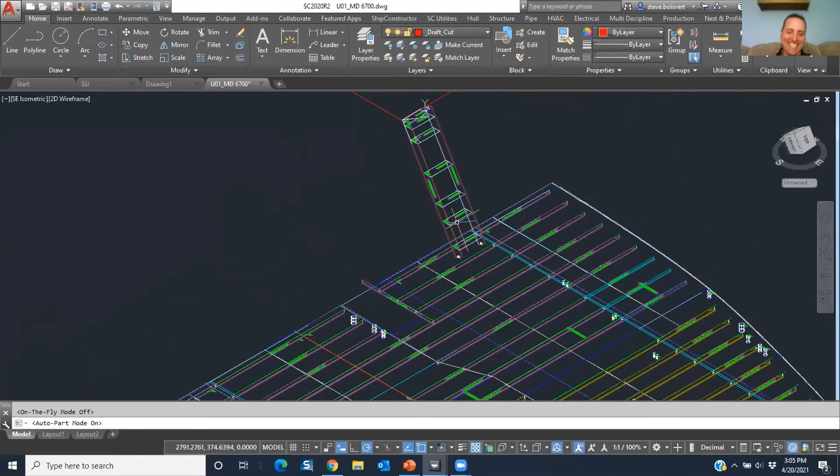I'd like to break in and clarify that is not an incline ladder I would make normally. Well, you made it. I know, but you're going to give me a bad rap. This is a test case, people. Well, it's a test case, and it was a test. Yeah, that's right.

So looking at this particular drawing, I thought, what kind of rule can we do? I'm just thinking about something simple that we can do to see start to finish how we're going to do it. I saw this little cutout here, and I thought, maybe there's a requirement that this cutout has to be a certain size, so we're going to start there.

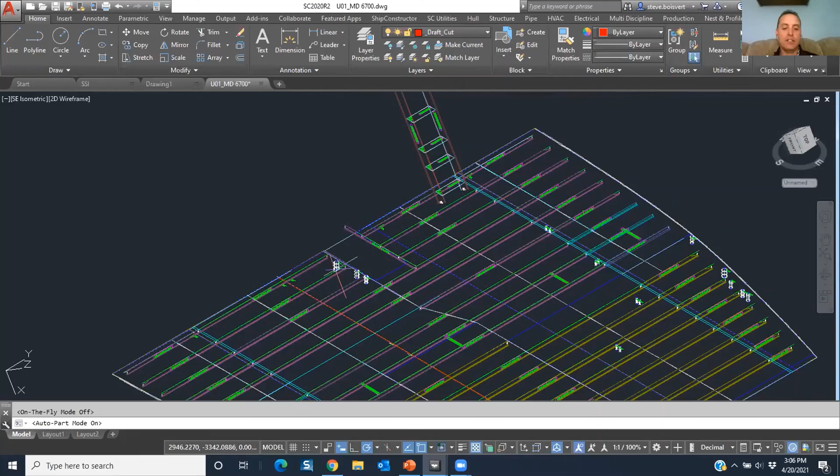So there's currently not a rule, and I haven't created anything yet. To do that, we're going to start from Auros. I have our NSRP instance of Auros open, and I'm going to go to our Workshop Connector community of practice, and it's going to start here.

So I have one knowledge packet in here that's really nothing, and I'm going to create a new one. We talked about this capture knowledge in these knowledge packets, but I wanted to show you how to do it. So I went to create new, and we're going to call this deck cutout, let's make it simple, right? And we're going to give it a description, required deck cutout width.

Pretty simple stuff. Now, all this is right now is text, right? So if someone came and looked at it, they're going to say, all right, deck cutout, required deck cutout width, what is it? I should have put in a value here, but I didn't think that far ahead. So we're going to put it in the value table. Here's where we create the brains of the rule, especially when we're going to connect it to a model.

So we're going to call this, again, cutout width, and we need to get a parameter. By default, I don't know if you guys can see this, but by default it gives it whatever the knowledge packet name is and a parameter name here, but that's not going to mean anything to us when we're in the model. So we're going to call this cutout width, right?

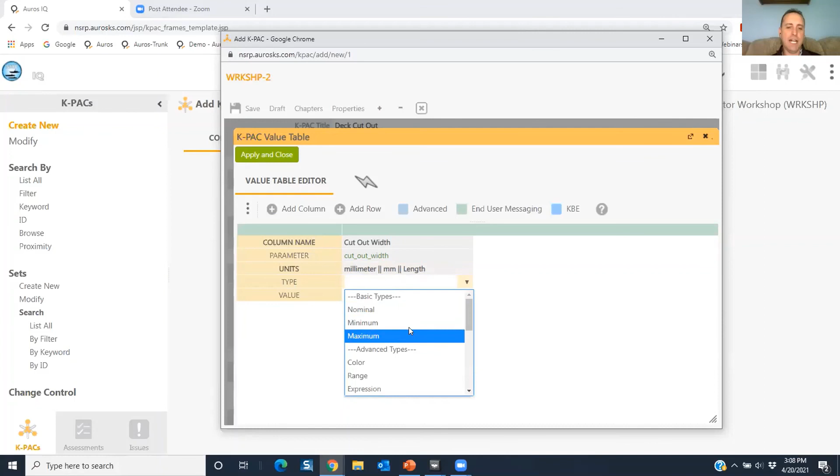Continue. And I have to define it. What are my units? Well, to make it simple, our model is in millimeters, so we're just going to say it's millimeters. And I'm going to say this is a minimum. So we have all these types - we can say it's a nominal or max or minimum or expression or derived value, a whole bunch of different types of value tables we can create.

We're going to keep it simple. We're going to say a minimum of, I don't know, 500 millimeters, right? So cutout width parameter, its type is a minimum. I have some units and I have a value. Apply that, and I'm going to save it.

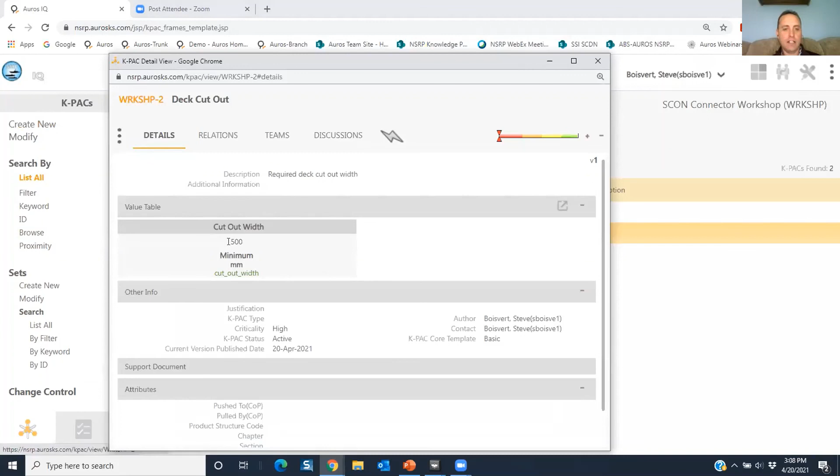We're going to make that active, and kind of following the theme of the videos, we're going to look at this particular knowledge packet. So now we have two: here's Workshop 2, required deck cutout, required deck cutout width. And to check it, cutout width - if I give it a value of 250, so if I connect it to that cutout with a measurement and the value is 250, we're going to fail. If the value is 501, it's going to pass. Pretty simple, so simple rule.

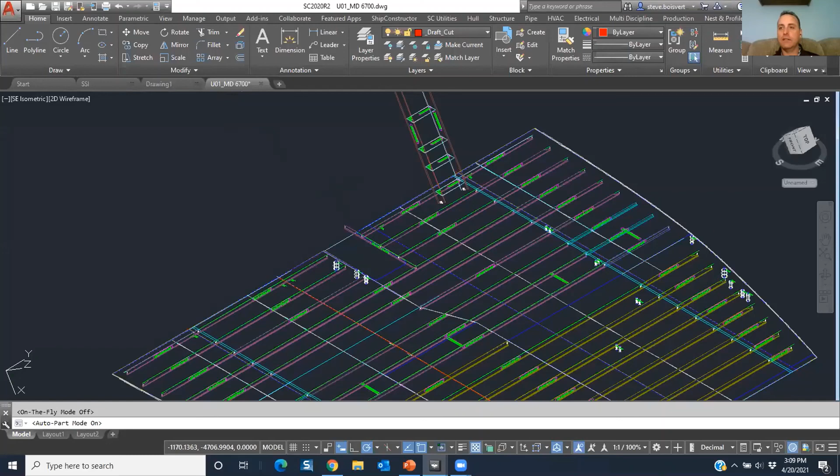All right, so we're going to go into ShipConstructor. So now I have an executable rule. We're going to go to ShipConstructor. And when I open up ShipConstructor, I don't have my Auros menu here. So I'm going to go to the right, and I'm going to tell it to go to Auros. And that opens up all of my connector options.

And again, we want to connect this to that cutout. So we're going to use a parameter. So if I hit this little Auros parameter, then our parameter palette opens. And you can see there's nothing attached to this drawing yet, and it's at the drawing level. You can see that here. And what I want to do is there's that little lightning bolt.

I'm going to check the rules. So if you remember the way I started, there's 3 primary things I got to execute. I got to define either the assessment control that's going to collect the knowledge packets that I want to apply, or I can go and just choose those knowledge packets. And that's what I'm going to do for this example. I'm going to tell it to go to our workshop.

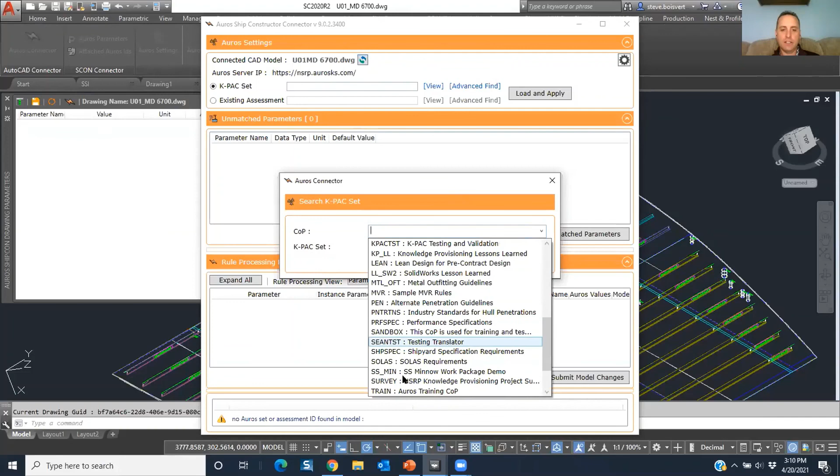Where's our workshop? Connector workshop. We're going to look at our workshop example, and I'm going to load it.

So what's happening now is it's making that connection to Auros IQ. It looks at that knowledge packet, because there's only one in there with a value table, and it's saying, all right, here's cutout width. But cutout width isn't part of our drawing. So I'm going to link that into the drawing by saying create unmatched parameters.

And this little window allows me to either create one parameter, or let's say I need to do a cutout width—maybe there's 3 cutouts. I could use that same rule and instance that rule 3 times, then measure 3 different cutouts, and check those 3 cutouts against one rule. That's what this is allowing me to do here, but I'm not going to do it because we only have 1 cutout, though I could create several instances of that rule.

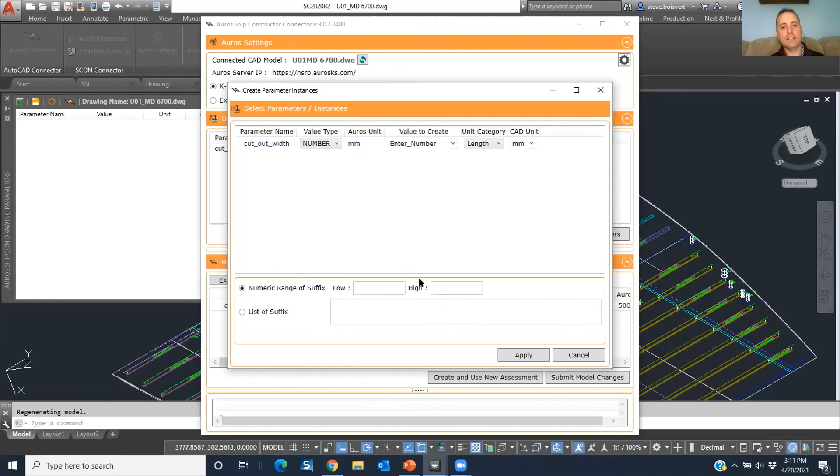So I'm just going to say create it. And you can see down here, let's close this window. You can see it's cutout width, and I don't have a value, it gives me this little broken link. If I refresh my view here, cutout width now shows up as part of my drawing parameters, and there's no value—enter a number. And it knows that it's in millimeters.

And now I have the opportunity to use my measure feature, right? I'm going to measure a distance, and we're just going to say it's from this corner—zoom out a little bit—to whatever, this corner. And I get the value from the model. It's telling me I'm getting it from a CAD measure. We're going to publish that.

And we're going to look at the rule. So now I have this value, 1043. I sent that back to Auros IQ. The rules engine processed it and said, the calculated value I need is 500. The model value is 1043. Therefore, I get a pass condition. And that's how the rule processor works.

So now let's go one step further. We're going to close that, and leave this open, and go back because maybe we also need the length. So let's go back here and we're going to edit this. And someone comes along and says, well, that's great that you have width, but we need the length.

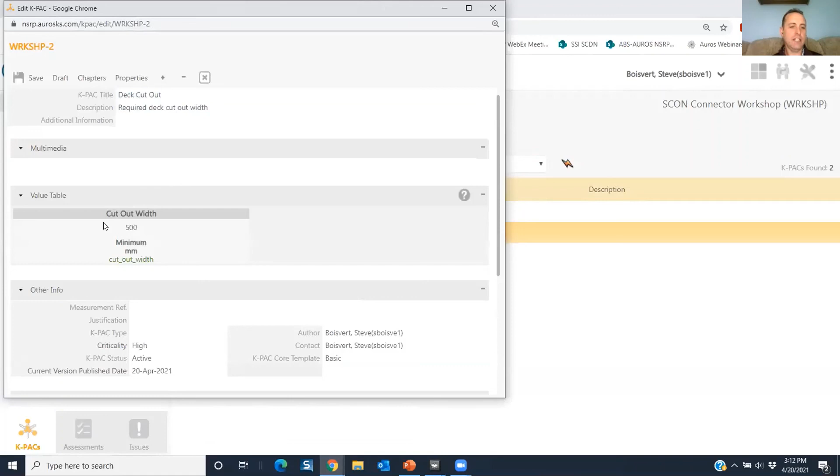So we're going to add another parameter—a column for cutout length. We're going to name this guy the same. Again, this is going to be in millimeters. Let's do a maximum this time, and let's say the maximum is, I don't know, 1,000. All right, so now we have 2 parameters, cutout width and cutout length.

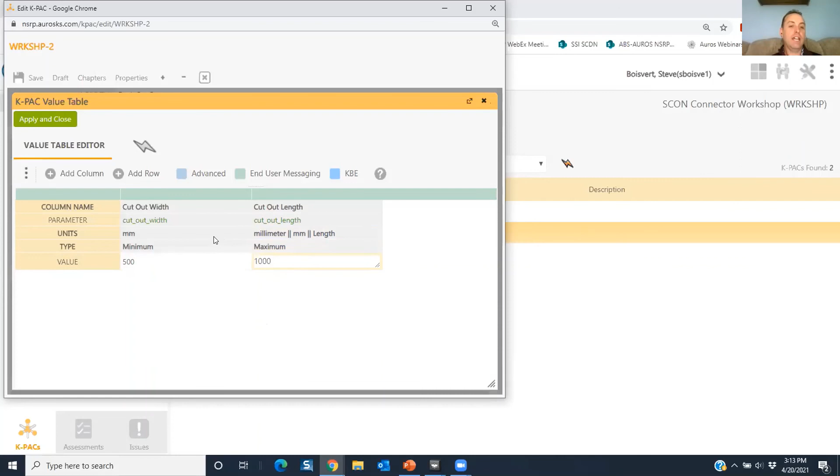We're going to apply that, save it. So now our knowledge is updated—we have some knowledge on what our cutouts need to be. And then now we're going to come back to our model. Let's come back over here. We're going to open our connector.

And as soon as I open my connector, it tells me, hey, there's a new parameter. So this stays connected to Auros IQ and it's constantly looking for new parameters. Even in this case, it also looks for new knowledge packets that match this criteria. So as I created that new parameter—say there's new knowledge being developed—it's going to show me here. So I have this cutout length. I'm going to add that into my model, right?

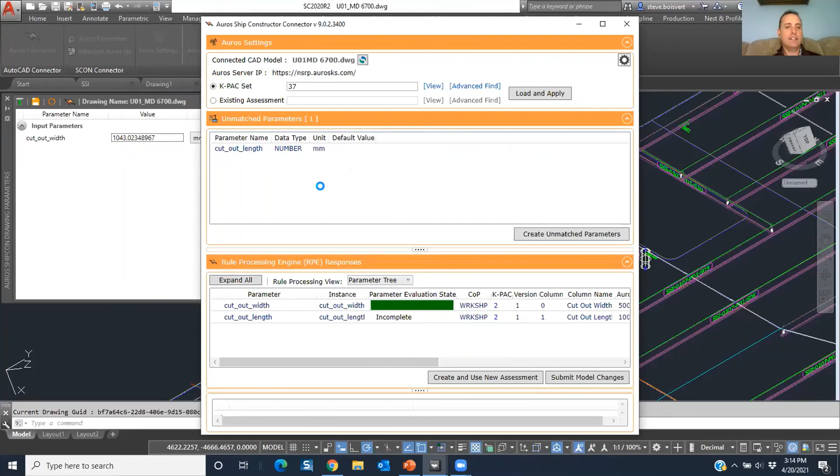Apply that—so that's going to get added in. You can see again, I have the little broken link down here. Do a little refresh in my drawing. Cutout width, cutout length. Let's do a measure distance. Pick there and say whatever right here. So we have 1,706 millimeters as the measured value.

If I process that, open it up, because I had that maximum condition, and my maximum was 1,000, we have 1,700—I get my fail condition. And I could save all this inside of an assessment, provide this to whoever. It would have information about my model in here.

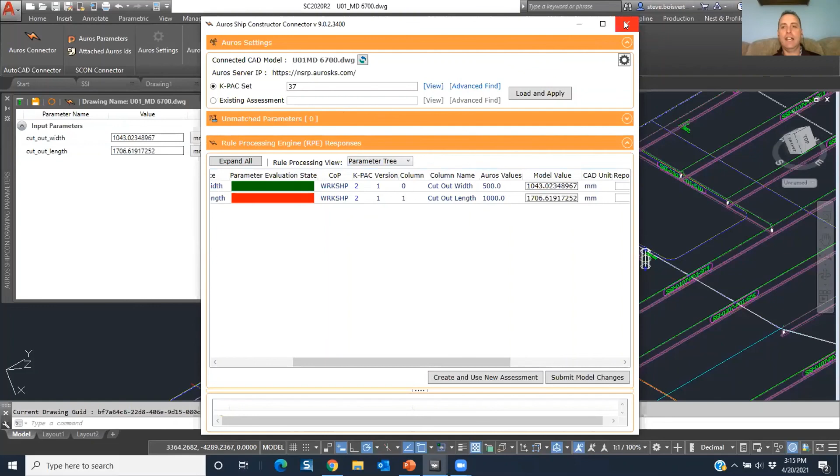All of these parameter values are stored against the drawing because that's what I've defined it as here, as user-defined attributes. So the next time I open this drawing, I'll have a reference that I've already applied these parameters to this drawing. I've applied this assessment to the drawing, and these are the values from the last time I ran my particular rule check.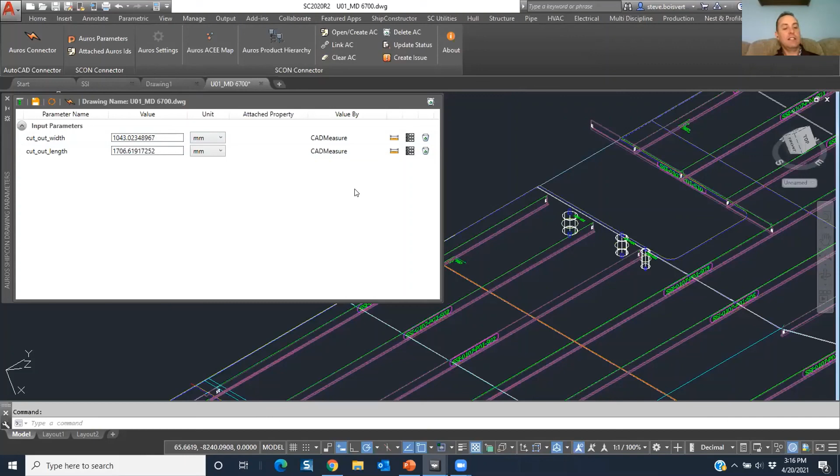Hopefully with the use cases we went through in this brief live demo, you get an understanding of the intent of the project. A major challenge was just being able to get these parameters into this environment and have them stay persistent and stored against either the drawing or the particular part that we run these rule checks on.

So with that, I'd like to open it up if there's any comments, if someone has a particular example they would like to see, or a request for something. Maybe we can create something quickly, or if we have the right rule model, we could execute it. If not, if anyone has questions, I'd be happy to answer those as well.

I had a question, Steve. This is Jason from SSI. If you've used the plate parameter in one of your rules, like stock thickness, and then that plate changes to a different stock, does that parameter update?

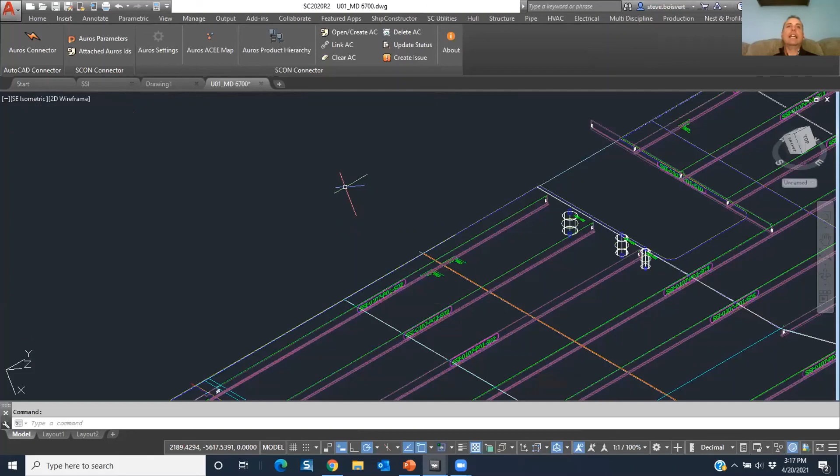Yeah, that's a good question, and the answer is it can. The way that particular use case ran through was in the welding one. The way I had it defined, if the stock thickness changed, it wouldn't know, because I named the parameter like thickness or plate thickness, while the parameter for that plate was stock thickness. But if I had named that parameter stock thickness, and the attribute for that value is stock thickness, then we have a parameter pair.

They match each other, and so as things change, the value gets passed, because the parameter is named the same as the UDA. It gets passed through the rule processor, and then that value updates the next time I execute the connector. So the issue is from naming — in our demonstration, names from our parameters didn't match. I probably should have done a rule set that had UDAs matching the parameter names.

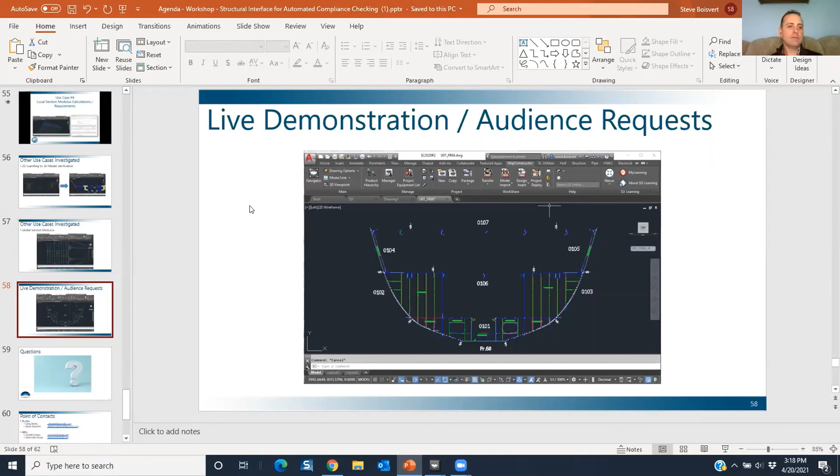Any other questions? Any feedback?

All right, well, that was pretty easy then. Hopefully you guys learned something new today, and if you can think of ways you may be able to utilize this functionality, please let us know. We'd be happy to talk to you more about it.